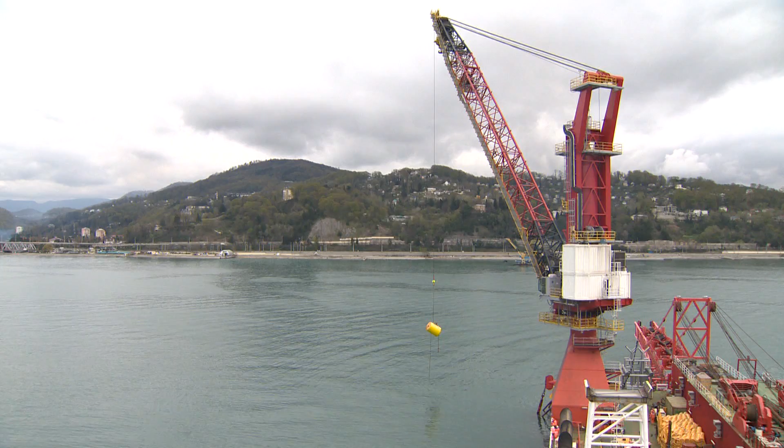This is a project that consists of 150 kilometers of pipeline, and it goes from a town called Dzhubga down to Tuapse, and from Tuapse down to Kudepsta, which is close to Sochi, where the Olympic Games will be held in year 2014. One of the most important things for this gas pipeline is the distribution of the gas, so the infrastructure in the country can be improved and they can prepare for the Olympic Games.

With a total length of 177 kilometres, out of which an offshore section of 159.5 kilometres, the DLS gas pipeline is installed on the seabed, along the shoreline at a distance of approximately 4.5 kilometres, having its final point of termination at the gas distribution facility in Kudepsta, in the vicinity of Sochi. GSP is the only Romanian company to win a project of such a scale in the Russian Federation. The initial value of the contract amounted to $269 million.

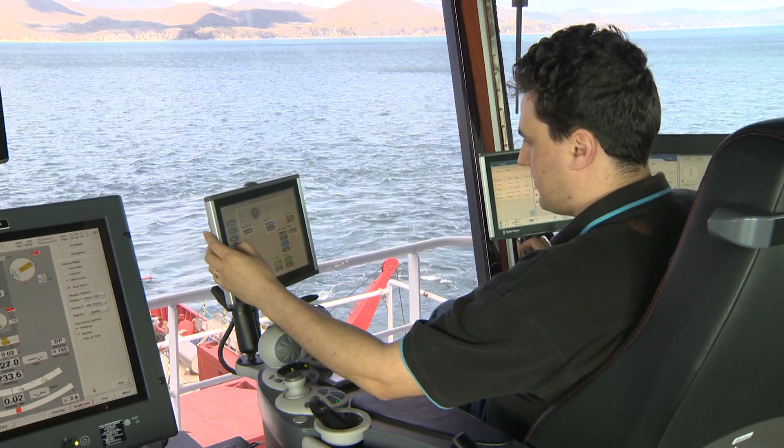The 530mm gas pipeline will have an annual flow capacity of 3.8 billion cubic metres. The offshore natural gas pipeline project was designed in such a way that it should be as distant from the coastline as possible in order to guarantee the substantial mitigation of the environmental impact on the Black Sea coast ecosystem.

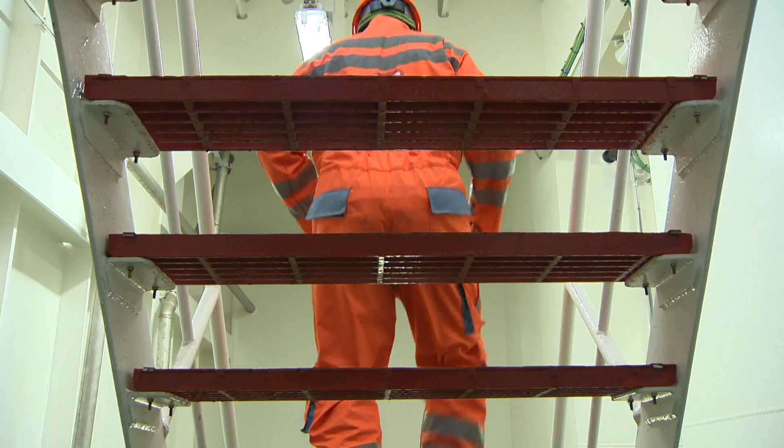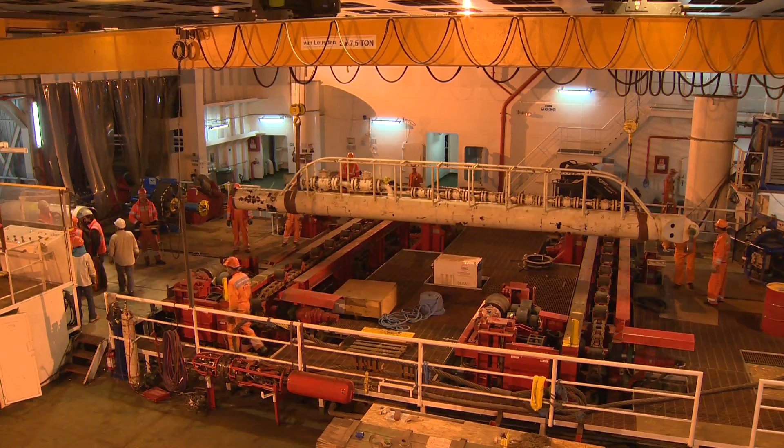DLS is a multicultural project comprising people of various religions and ethnic groups, as well as an extensive professional range, from fitters and welders to NDT technicians, ROV operators, divers and diving support operators, marine crews, designers of pipelines, oil and gas installation and commissioning engineers. A great variety altogether. A great number of nationalities have come together in this project to bring their engineering expertise. Romanians, Russians, Dutch, British, Thais, Malaysians, Italians, Spanish and many more.

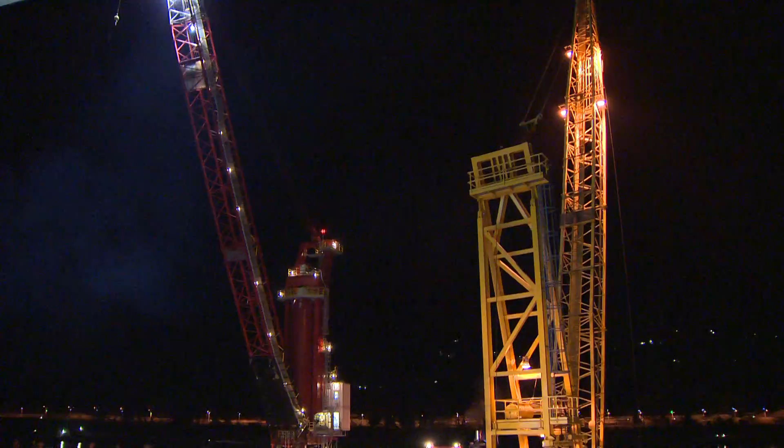The construction of offshore projects was under GSP's coordination. GSP carried out the main offshore works in approximately 100 days between March and July 2010. GSP has experience of large-scale projects and projects of outstanding importance. DLS wasn't in any way a simple project. I consider that this company is a leader in this part of Europe, especially in the Black Sea, regarding the drilling industry and the pipeline. Our job, I mean the Bigfoot One job, is to lay pipe in Sochi.

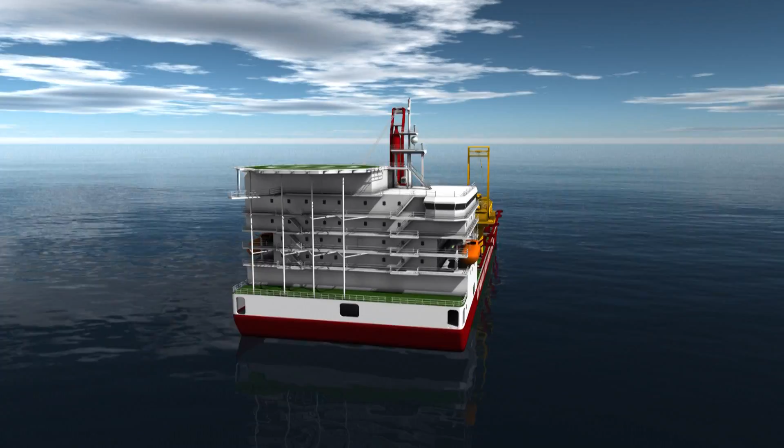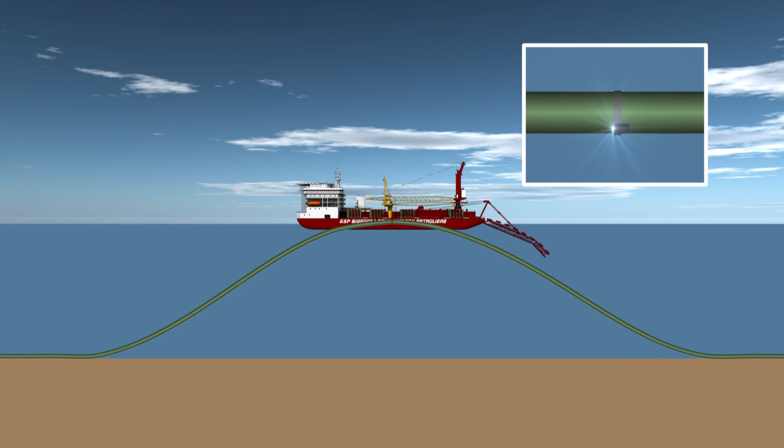The last 5% of the project works were completed in May 2011. Once the connection of the offshore and onshore sections of the DLS pipelines were completed, GSP Bigfoot One performed the final mid-line tie-in, welding together two sections of pipeline near the Kudepsta settlement. Previously, similar works were performed near Tuapse, Dzhubga and Novomikhailovsky.

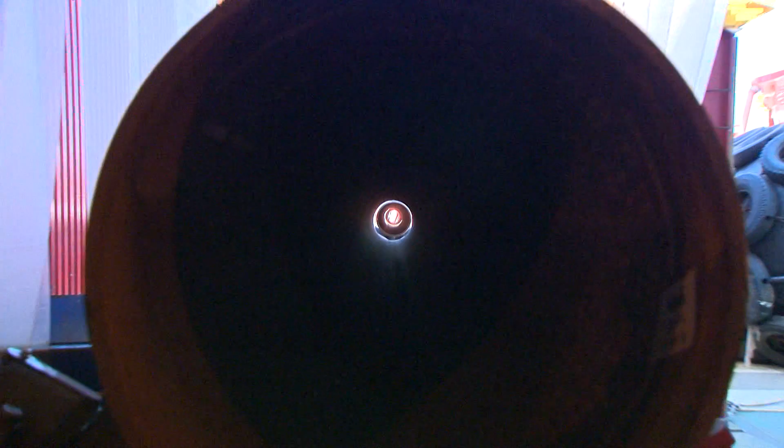The onshore-offshore connection of the DLS pipeline, Southern Loop, was then followed by pressure testing, dewatering and drying. The testing and drying of the Northern Loop and Dzhubga-Tuapse section had already been completed. You may become aware of the dimensions of the DLS project once you learn about the offshore section, which weighs 84,000 tonnes.

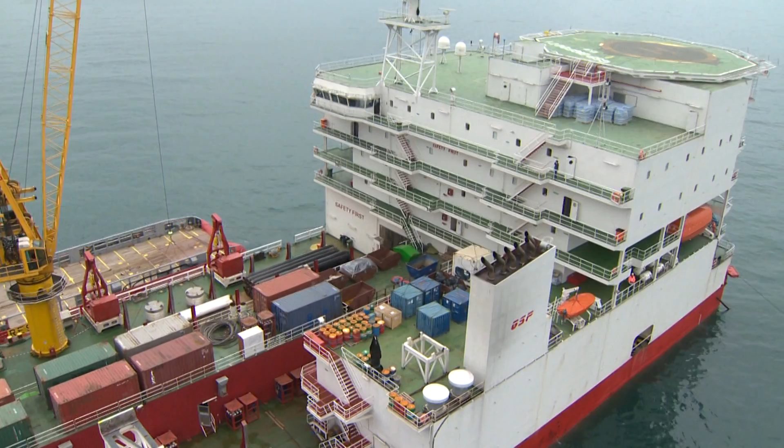GSP's offshore technological camp was quite something. An extensive international fleet mobilised offshore of the Caucasian shore at about 4.5 kilometres. 2 pipe-laying barges, GSP Bigfoot 1, built in 2010 in GSP Shipyard, and Seamast. GSP Prince, the most modern OSCV and DSV ROV in the Black Sea, built in 2009 in Norway.

GSP Phoenix, PSV, intended for manpower and materials delivery. GSP Vega and GSP Queen, the anchor handling tugs. A 12-man, 300 metres of saltwater saturation diving system. A fleet of ROVs for pipeline route surveys, as-laid surveys, monitoring of trenching and divers operation and subsea installation works.

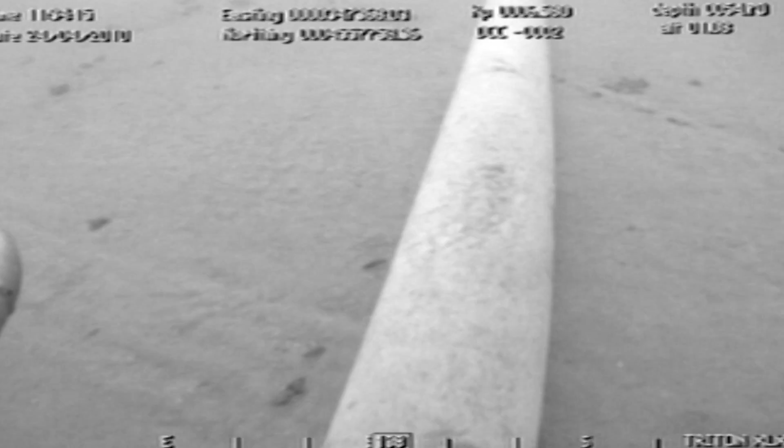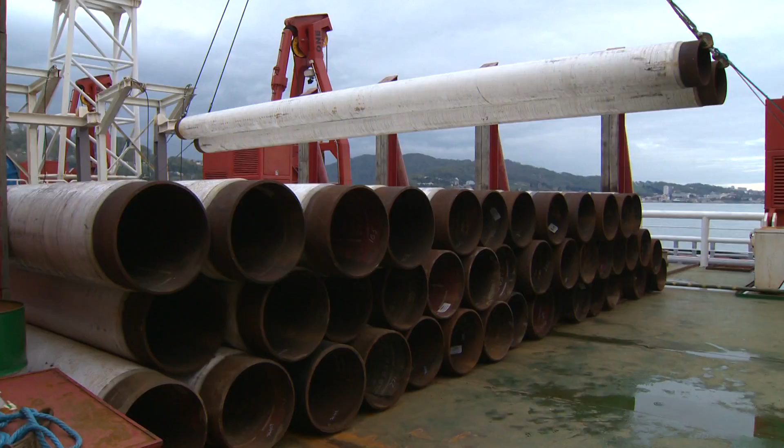The gas pipeline fabrication process consists of several stages. The pipe-laying barges ensure the entire pipeline fabrication and technological processes: beveling, automated welding, non-destructive testing, coating testing, and finally the pipeline launching out of the stinger to the bottom of the sea. The pipes are transferred from the storage area with the help of a special pipe conveyor system, beveled and immediately after that automatically welded.

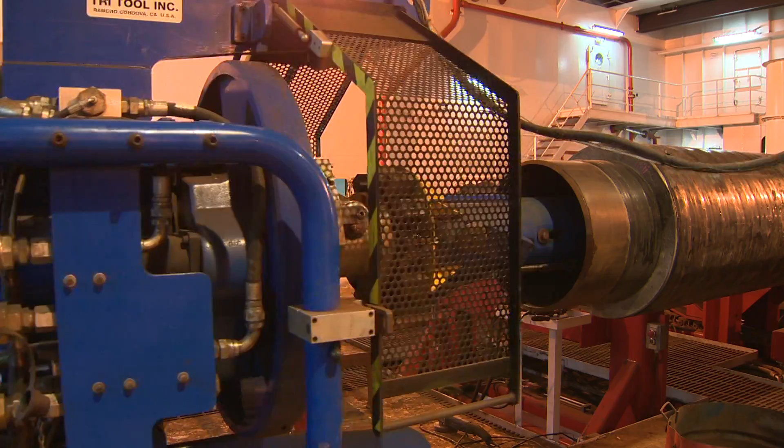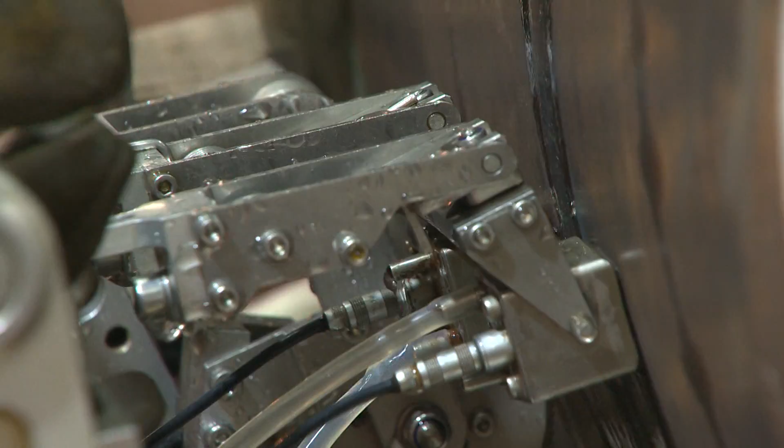Once examined for flaws or defects at the NDT station, a welded joint is treated in a special way to ensure protection from leaks or mechanical damages. All these operations are performed on the firing line. After that, the pipe is launched onto the seabed using the stinger.

The entire process lasts approximately 8.5 minutes. Thus, every 8.5 minutes, the gas pipeline gets 12.2 metres longer. While the vessel moves at exactly the same speed, it is almost impossible to notice the vessel movement.

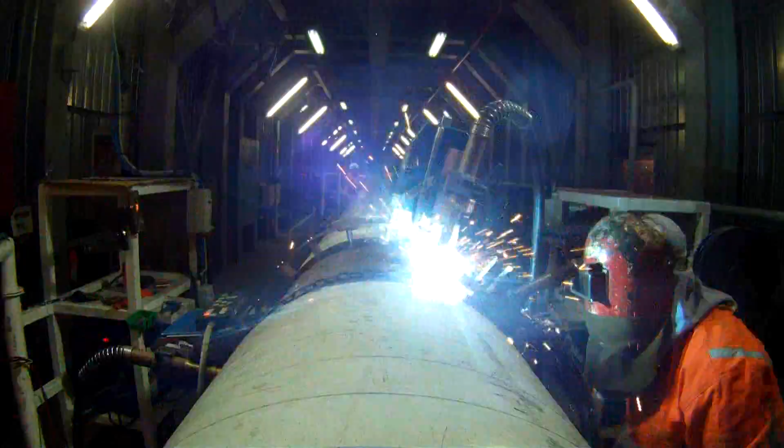The pipeline grows slowly, with approximately 2 kilometres per day. Taking into consideration the offshore mobilisation works, words like slowly have a new meaning. Technologically speaking, a 2-kilometre pipeline installed daily in normal weather conditions is quite something.

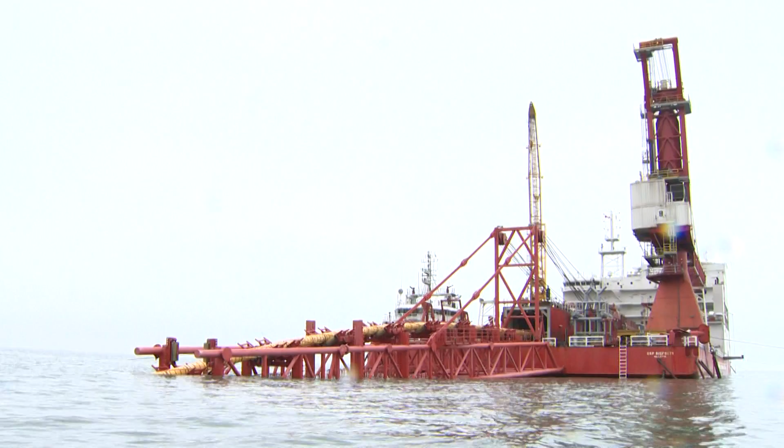The onboard pipe supply for the firing line fabrication process is stored on the main deck, neatly stacked in lines occupying up to dozens of square metres.

GSP Prince looks impressive, and we can assure you it is. It is the most modern OSCV, DSV and ROV vessel from the Black Sea. It was built in 2009 in Norway. The vessel can operate in extreme weather conditions.

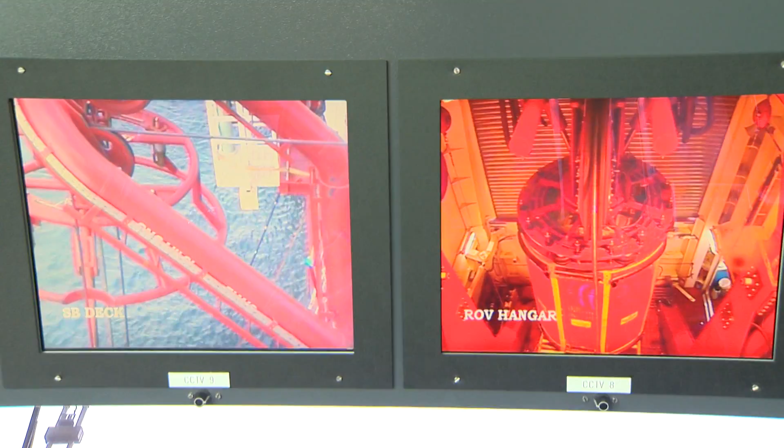It can perform tasks such as underwater inspection of cables, routes and pipelines with ROVs, seabed mapping, subsea installation works, diving operation support, geotechnical studies, and manned and unmanned subsea vehicle support, surveys, inspections and investigations. GSP Prince was the main ROV and DSV support vessel in this project.

In order to lay down pipes, you need a pipe supply, and the pipes are stacked on the deck. The standard dimension of the pipe is 12.2 metres, and at this diameter they weigh 6.4 tonnes each, including the cement coating which ensures the negative buoyancy of the pipeline. All the pipes are manufactured at the Vyksa Steelworks and coated with concrete at the Moscow Experimental Pipe Procurement Plant.

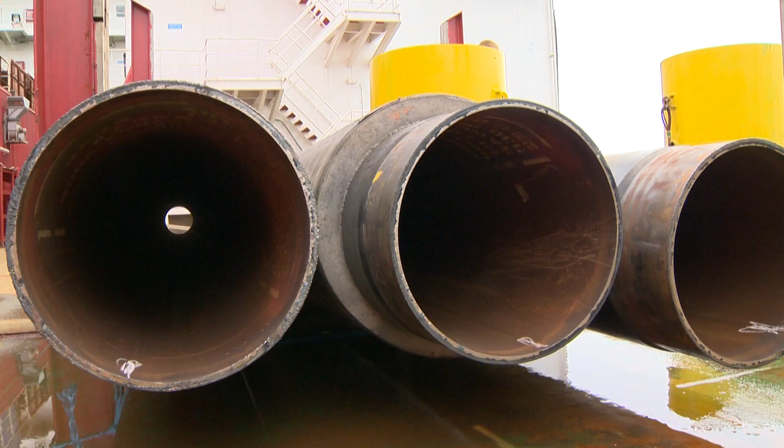They are brought onto deck and stacked in zero bay by the joint handling NOV crane. The pipe joints are stacked in special racks and the same crane moves them onto the production line. The first operation is a quality inspection.

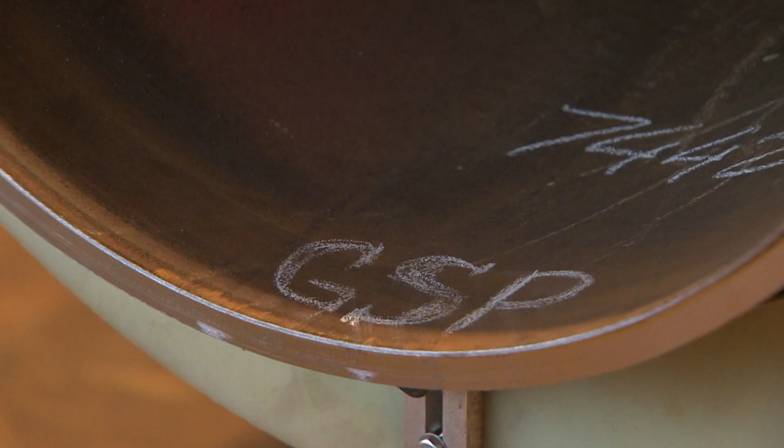The purpose of this operation is to inspect the entire surface of the 12.2 metre long pipe in order to discover any fabrication flaws or deformities caused by handling. Given the impressive size of the pieces, small irregularities may look unimportant, but due to the harsh environmental conditions at the bottom of the sea, any small problem may evolve in time, generating complications. This is why, at the QC station, the inspection is done thoroughly.

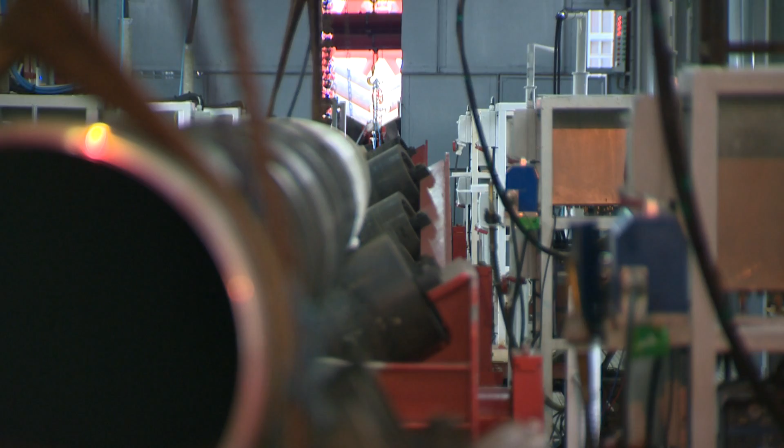Pipes are aligned and directed to preparative workstation 1 for the J-type bevelling operation. Here the bevelling is performed with 2 hydraulic cutters simultaneously operating upon both free ends of the pipe. The picture is pretty simple here. The equipment you see is exactly what is needed in order to lay down the pipes.

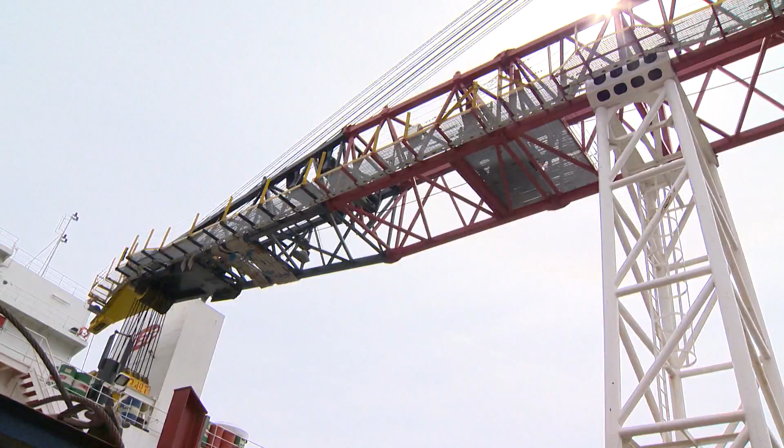A heavy lift crane, a Liebherr with 318 ton lifting capacity, an NOV pipe handling crane, conveyor rollers, an S-lay stinger, and a brand new fully operational firing line and an army of perfectly trained operatives.

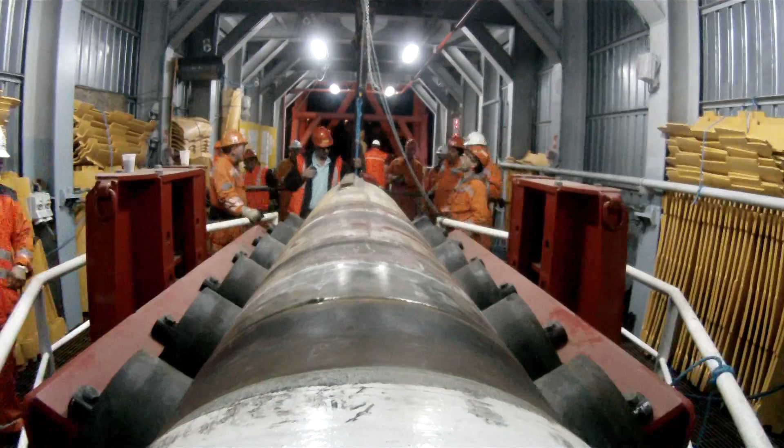This is the first pipe segment, and 6 working stations away it will be placed on the seabed. In this particular case, for reasons that will become clear later, the pipe section has a launching head at the start. This is designed to sustain the traction tension of the entire pipeline, ensuring its tightness in submersion, but we'll get back to this.

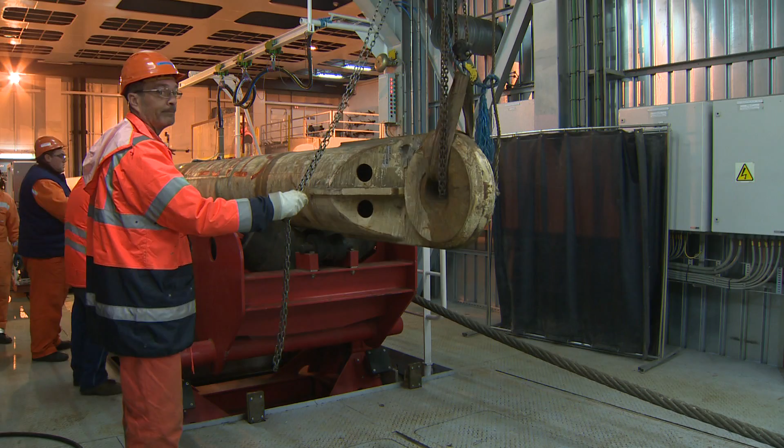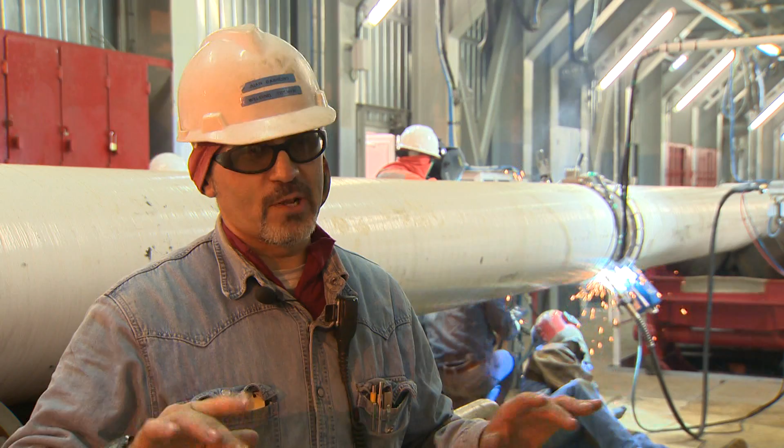The pipe sections are rolled on the firing line or the fabrication line. The most important operation, welding. We have here 3 welding stations, 3 complete welding stations. The first one is the most difficult because we need to adjust the pipe, make the line up, put together, and then we weld 2 passes, the root pass and hot pass.

When we finish, we press the green light, and if all the stations are in green color, the pipe moves to the next station. Then the pipe arrives to station 2, and in station 2 they weld another 2 passes. In order to ensure the welding quality, they preheat the pipe to 150 degrees centigrade using an induction coil. After its completion, the pipe sections enter the fabrication process.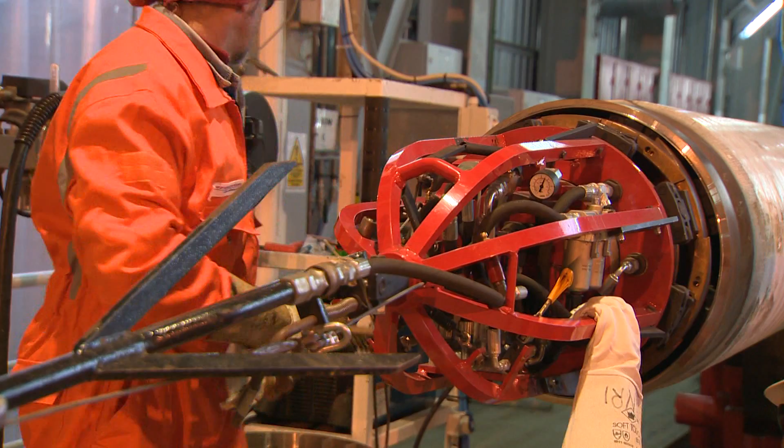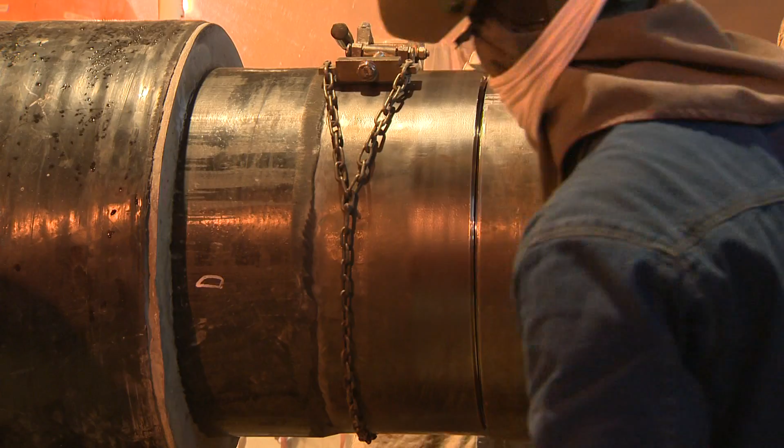The correct welding operation has a number of compulsory stages. The pipe sections are aligned with support of the pneumatic device, which ensures all of the dimensions and alignment requests are observed according to procedures. A complete joint includes 5 welding rings or passes as follows. The first one is called the root, and then comes the hot pass.

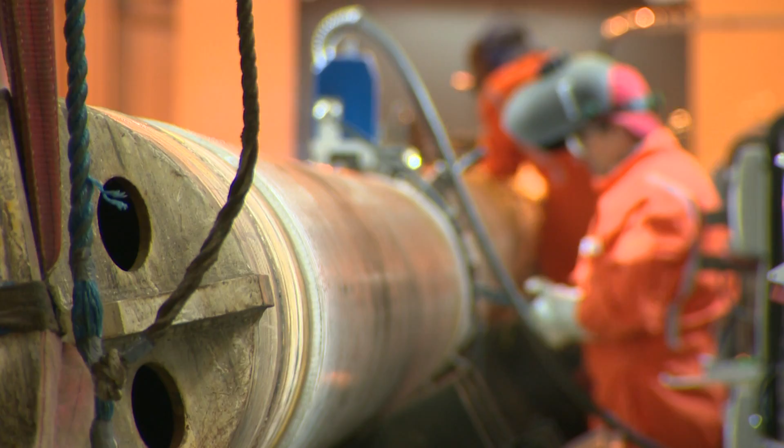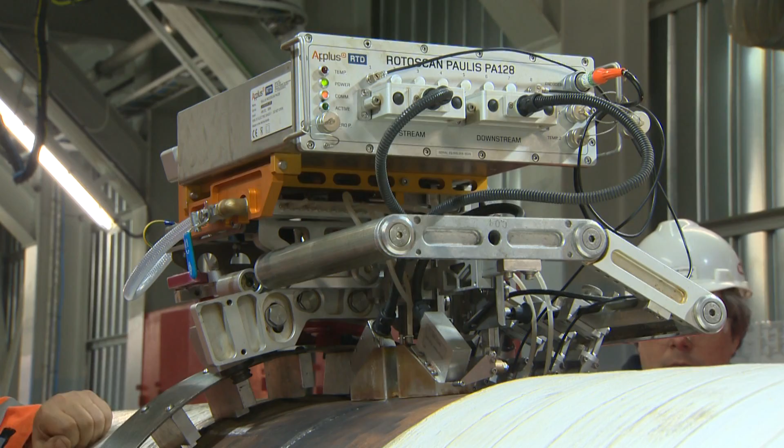No matter how thorough the job is done at the welding stations, there is always a risk taken into account. This is why the pipe goes to workstation 4, where a non-destructive ultrasonic testing is performed. The QC team inspect the welding for gas bubbles, lack of penetration, lack of fusion, porosity or cracks, for example.

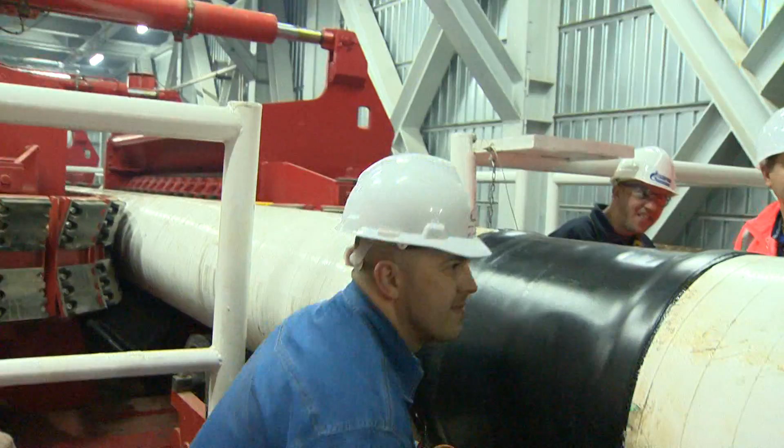We start with checking all the pipes inside the firing line, and we check the dimensions, check pipe numbers and bevel on both sides. After this, we supervise all the activity on 3 stations, welding stations, along the firing line, and when we finish all these activities, we supervise the coating activities on the stern of the barge vessel.

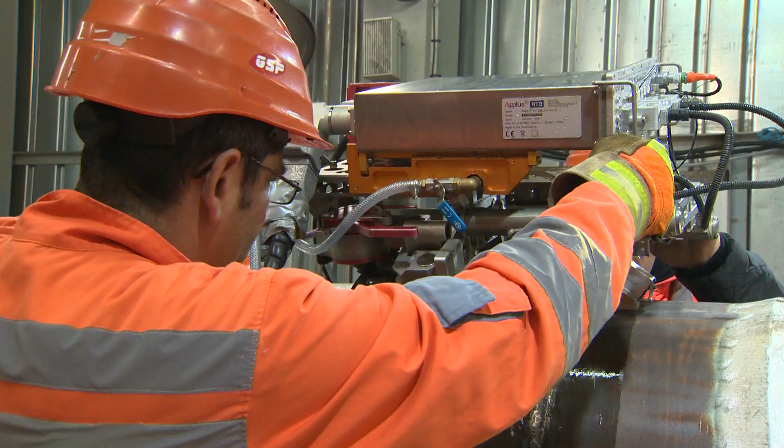Nothing escapes the automatic ultrasonic testing equipment, and the data is analysed and saved. In this case, as hoped for, there is not even a minor quality issue with the welding being checked. And speaking of the QC, there's not a single point in the entire process where they are not present and involved.

Welcome to the 5th station. Here they perform the cleaning operation. The welding is cleaned as well as its neighbouring area and the protective layer of pipe. Here at workstation 5, the welded section of pipe is prepared for the application of anti-corrosive protective layer.

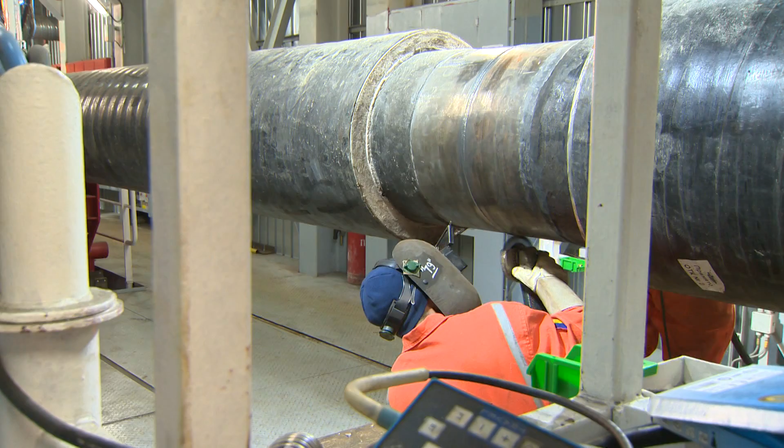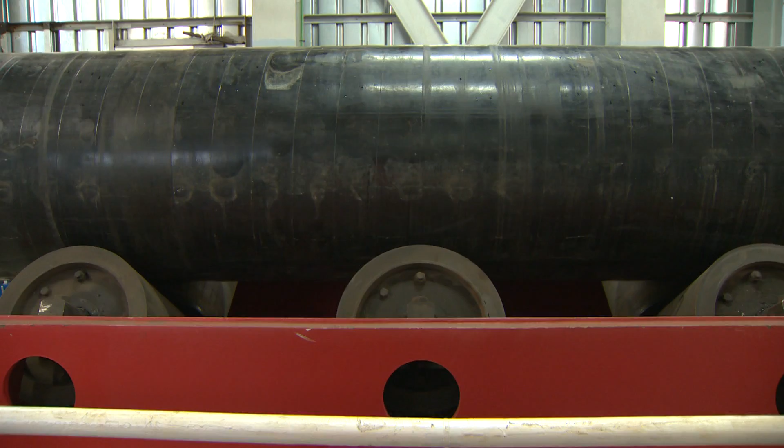From this point forward, what we call the pipeline arrives at the tension area. The tensioners are highly important for the pipe laying process as they are controlling the pipe launching from the barge into the water. Here the curvature radius of the pipe is monitored from the moment the pipeline leaves the last roller of the stinger, as well as the curvature radius of the pipe at the seabed contact point on the predetermined pipeline route. By contrast with other places and processes where speed is the most important factor, here the clamping and launching tension matters most.

And just how strong do you think the tensioners are? 80 metric tons each, that's how strong. 2 train locomotives on each side could not hold the pipeline as well as the tensioners do here.

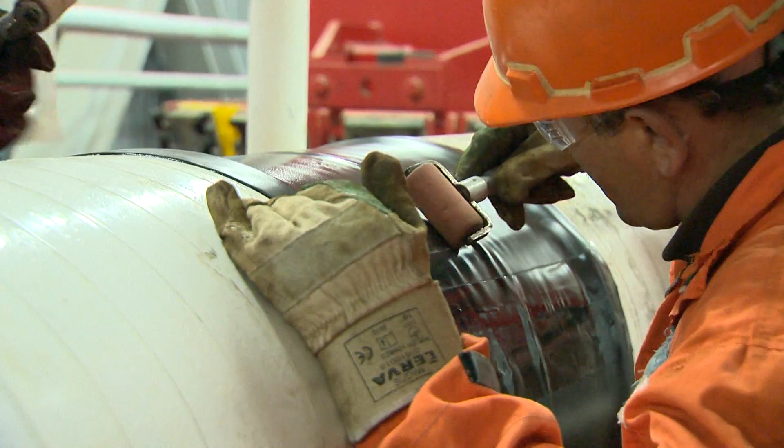Let's return to the firing line. We're here at workstation number 6. Here, in the process of protecting the welding, an extremely important element is added, the heat shrink sleeve. The easiest and most effective way to do it? With a gas lamp.

The heat shrink is applied over the uncovered area of the previously cleaned metal surfaces exposed to the welding process. The sleeve has the necessary width to cover the unprotected area. Being heat sensitive, it shrinks over the designated area under the gas flame exposure, leaving behind a perfect field joint coating resistant to corrosion in time.

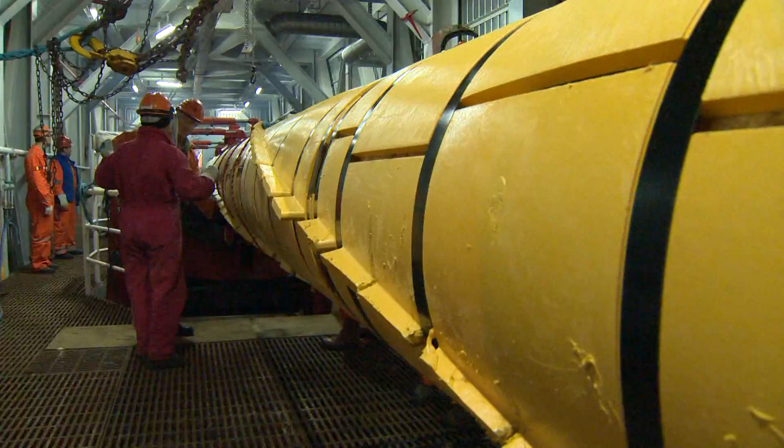It is obviously a little bit crowded at Workstation 6, but there are two more operations carried out here. Firstly, the pipe that goes into the mountain casing is wrapped in stakes, or as everyone calls them, crocodile tails. This is for obvious reasons.

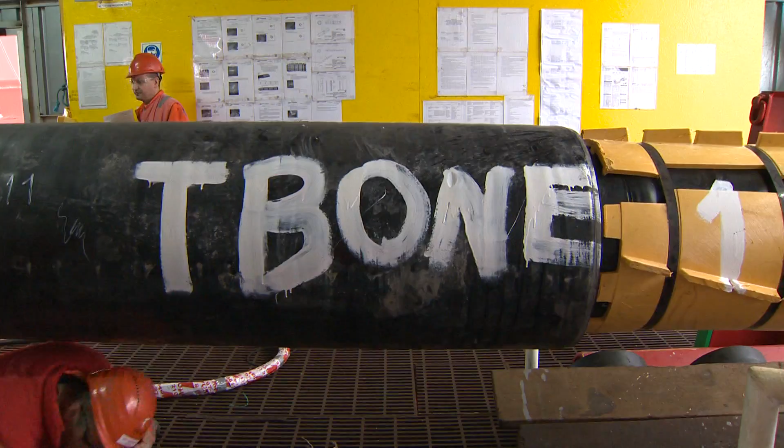And secondly, for the concrete coated pipe, due to the fact that the cement field joint coating is thick, the protection area had to have the same thickness. This is done with foam injection. Step 1, they cover the area with a metal sheet. Step 2, final fixing of the metal sheet. Step 3, a little more predictable, they inject the foam.

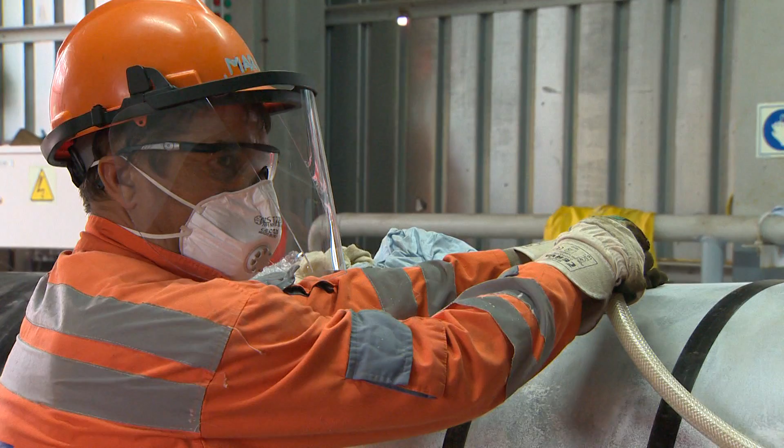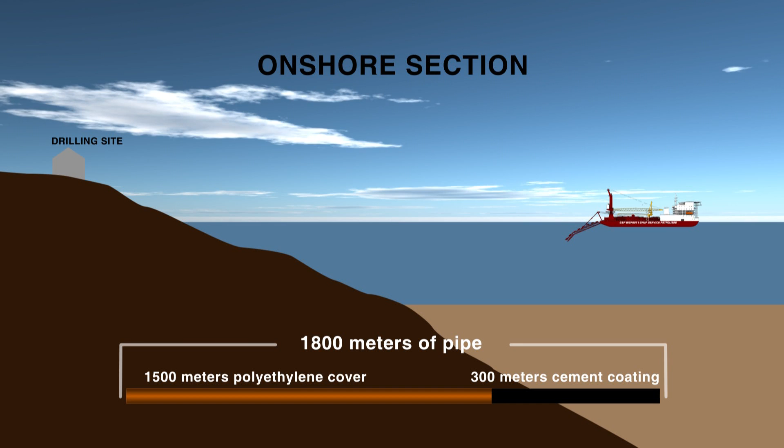Now let's stop for a minute and see what this is all for. An onshore approach section. So a total of 1,800 metres of pipe, 1,500 metres have a polyethylene protective cover, 300 metres have a plus of cement coating. Out of this 1,800 metres, 1,500 metres are pulled through the casing that awaits already on the coastline.

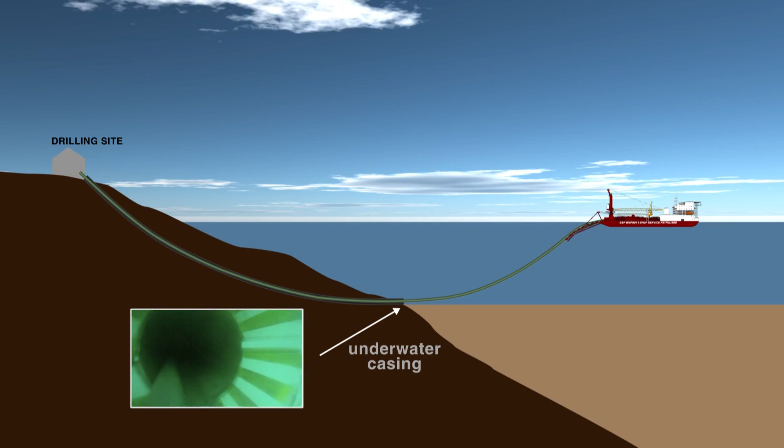From the shore side end, a drill string is sent down. Slowly it goes out from the underwater casing, being pulled along by GSP Bigfoot 1. Remember the launching head? Now we go back to it, because it's time for action. The drilling string is attached to the launching head, and again, slowly, very slowly, 1,800 metres of pipe go back through the directionally drilled casing and up into the mountain.

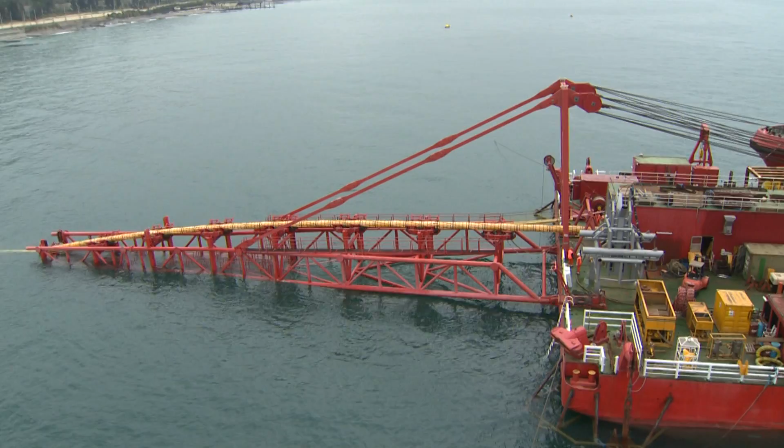Simple as that. Actually it is, but only because thousands of incredibly beautiful minds previously worked their brains out till this process is just right. Impressive.

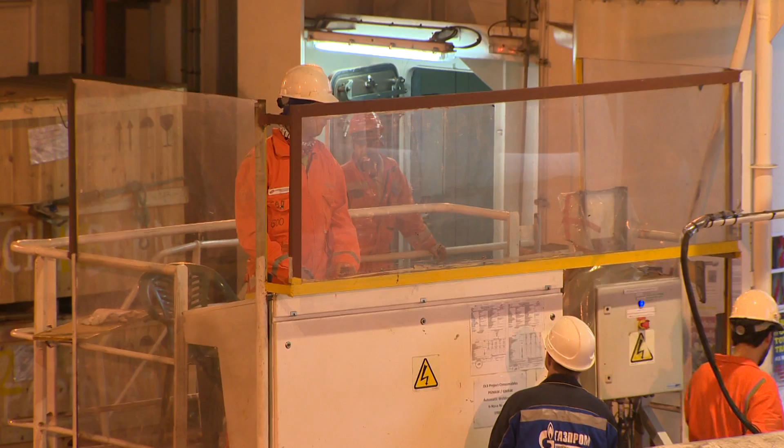Once the pipeline leaves Workstation 6, it is ready to get into the water, but not until getting the OK. Each workstation is endowed with a control panel with ready and work in progress commands. While one of the red lights is on, it means that somewhere on the firing line someone is still working. Depending on the works being performed at the time, the station operator enables or disables the station status. Immediately all operations are completed, the green lights appear.

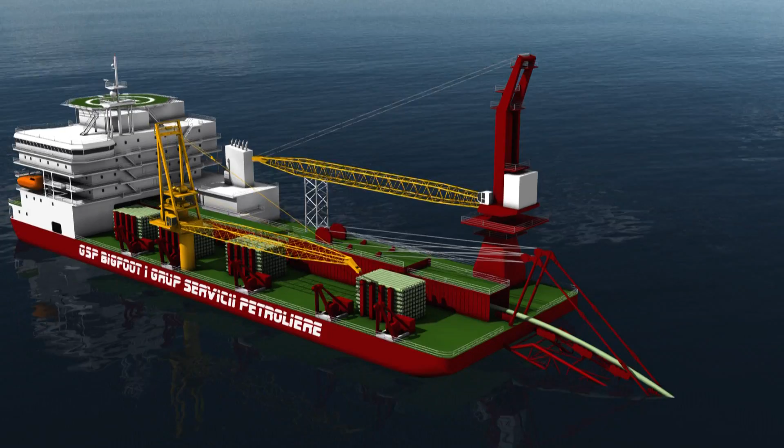Of course, the launching of the pipeline into the water is performed according to a perfectly designed process, with the support of the stinger. It does not only sustain the pipeline, but also controls its curvature radius. The curvature radius is highly important. In fact, so important that this process doesn't have a name but two. The superior part of the S the pipeline designs into the water is called the overbend. The inferior curvature is the sag bend.

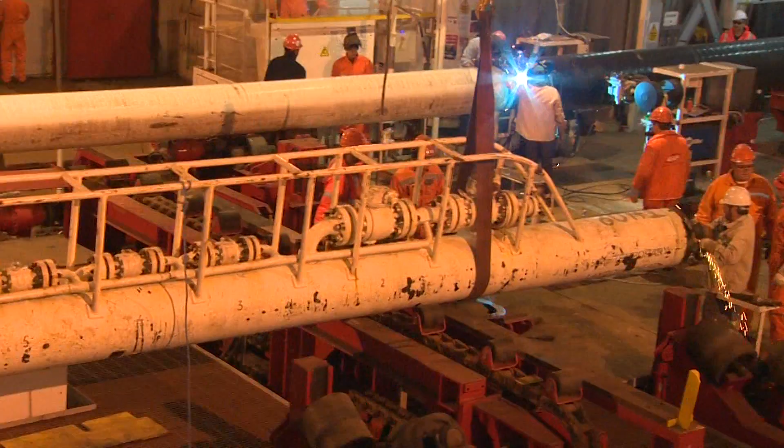So, they have just finished welding the last piece of pipe, but before they perform the connection between this one and the one already at the bottom of the sea, the preparative is made in order to test the pipeline. The pigs rush in. The pipeline internal gauges are basically big cylinders with the same diameter as the pipe. Using water pressure, the pig pushes the device throughout the entire length of the pipeline. And if everything is okay, they come out the other end in perfect shape. Actually, they did come out intact. But the workflow is not yet complete.

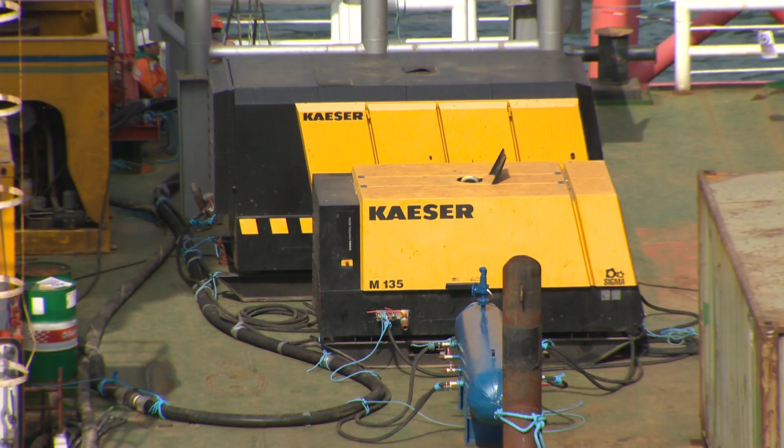For protection purposes, the pipe must be protected and buried in sand. For this, they use a jet air tool. In the final phase of the operation, the pipeline will be trenched from the casing exit to the tie-in area on a distance of 300 meters to a depth of 1.5 meters. This work will be performed by means of a jet sled machine.

Operating at high pressure, the machine will dislocate the soil, leaving behind a desired trench depth which will protect the pipeline in the future. They put this tool over the pipe. The water is pumped at 20 bars and the sand is displaced, and gravity does the rest and the sand settles down over the pipe.

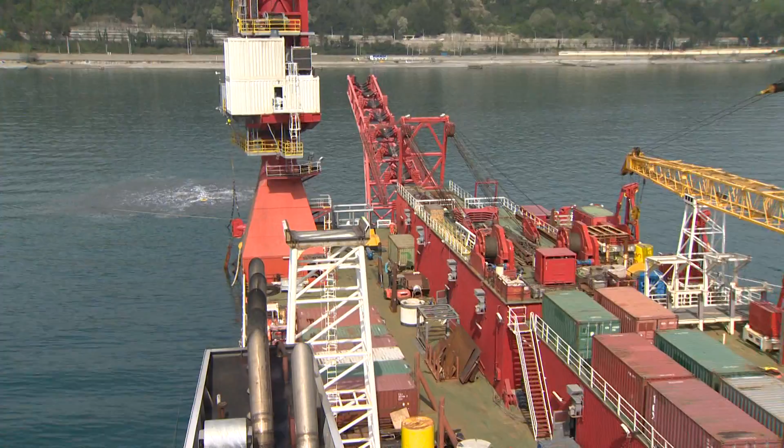Sure, now it is hard to see what otherwise is obvious in this big technological marine adventure. As the anchor foreman said, it seems chaotic. Well, maybe it might look like searching for a screw in the haze of pipes and anchors, but as the foreman added, it's highly controlled chaos. So in the end, it is all for a big purpose. Though it's not visible under a metre of sand, the pipe is extremely important for this developing area.

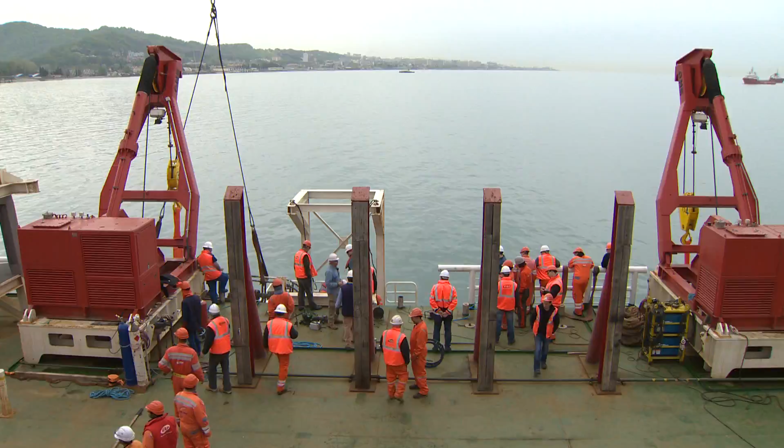We have a few loose ends now to try to clear up. How do they make a joint between two subsea pipelines? We have a name for this operation, midline tie-ins. Let's see how the offshore installation and welding engineers figured it out, or even better, how they do it on board GSP Bigfoot 1.

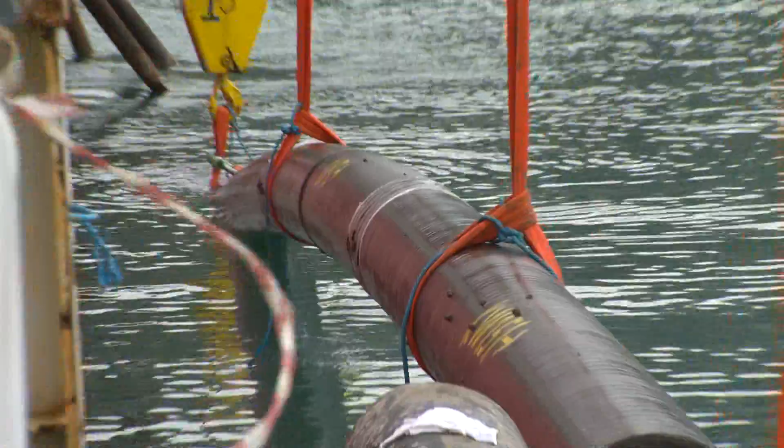Lifting of the pipeline end will be carried out using the 6 davits installed on foundations of Bigfoot 1. The davits will lift the pipeline above the waterline in a safe manner so that welders can perform the tie-in weld. 6 davits are installed on the technical vessel. 3 of them hold the previously made pipeline section, the other 3 the newly made pipeline section. Both ends are held above the water at deck level, one end facing the other.

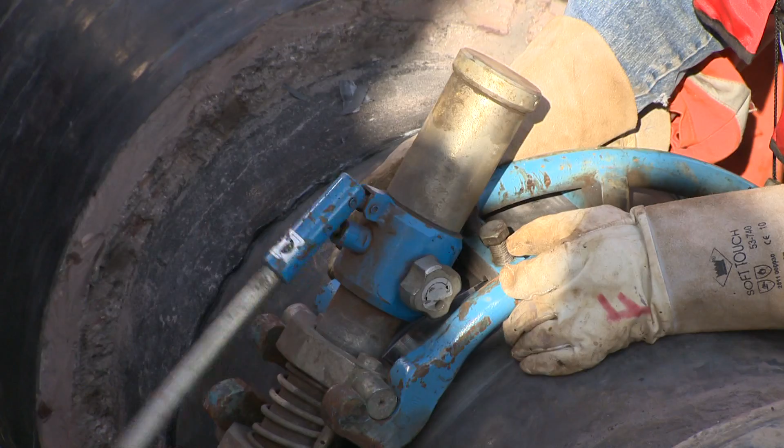First they take off layer after layer of coating. Concrete and metal reinforcement structure, then the polyethylene layer. Then, with the support of an external line-up clamp, they perform by hand one last weld. Be assured the handmade weld is as good as the automatic one. Those guys know their business. They have sealed pipelines all around the world. After the weld is complete, field joint coating is applied to protect the tie-in weld area.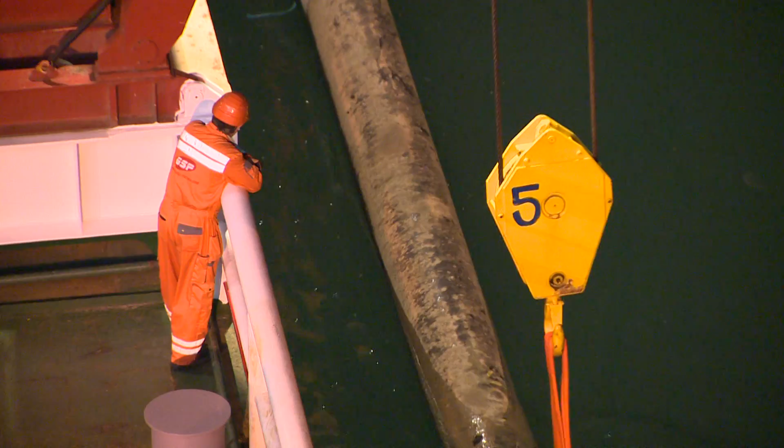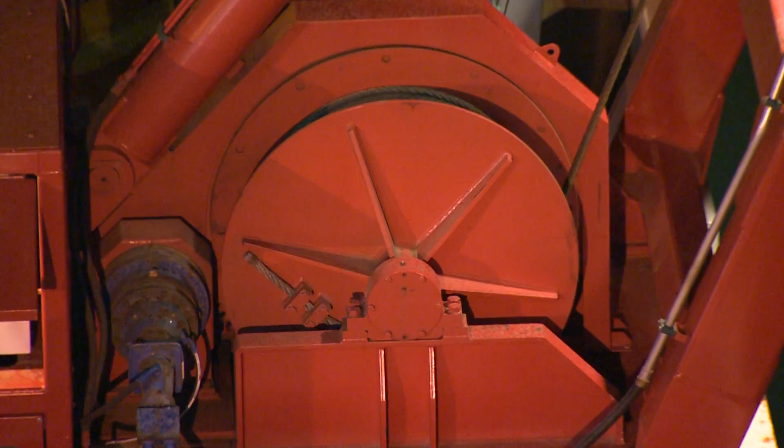There's another operation to be performed in order to consider the job ready. The pipeline has to be placed back on the seabed. In order to compensate for the loop made when the 2 pipeline ends are taken into the sea, GSP Bigfoot 1 performs a side movement and lays the entire pipe on the bottom.

This is one of the moments when the ROV enters the stage. This is Mohican. It's a light work-class inspection ROV and it has fitted a Hydrolec 5-function hydraulic manipulator, a SeaKing sonar, a silicon intensified target black and white camera, a color zoom camera, able to operate at 2000 meters depth of seawater with 130 meters of working tether.

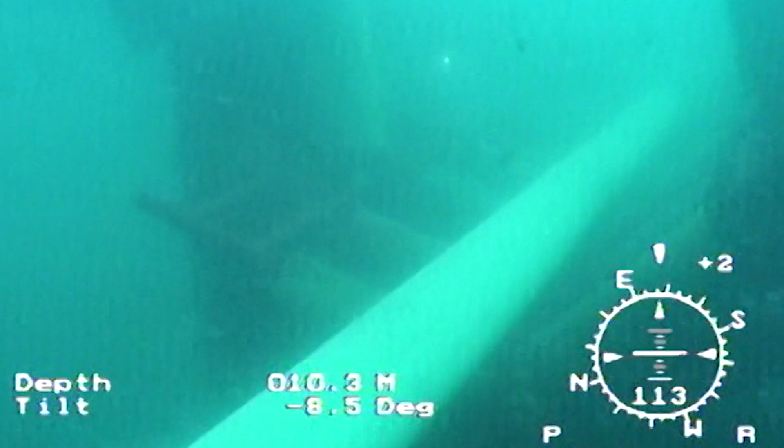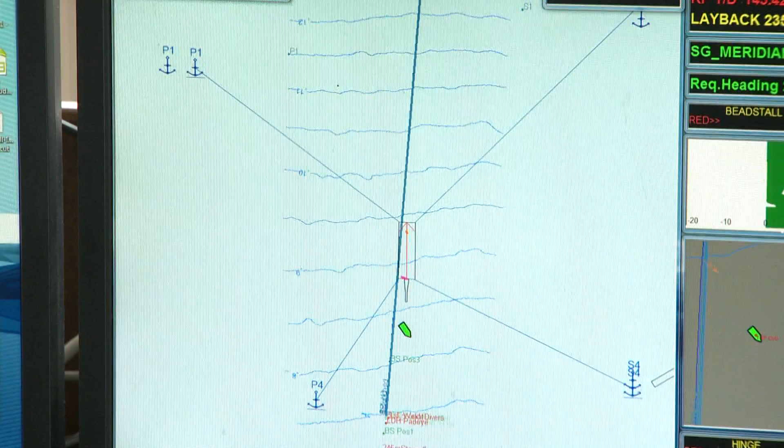Because of this subsea robotic vehicle, any problems that might appear after the pipe enters the sea could be instantly spotted and rapidly resolved. Throughout the process, the technical vessel must be highly stable. 8 winches control the pipe layer's station, keeping it stable. Here's the place the 8 winches are controlled.

This way, 8 thin tentacles with 8 anchors at the ends cling onto the bottom of the sea. With slow movements carefully calculated and verified by computerized survey systems, they lead the barge in the required direction. Each anchor winch has a tension capacity of 80 tons. Each anchor has a weight of 10 tons. For this kind of floating technological camp, you might take into account that it becomes compulsory to use some impressive pieces of technology to control it.

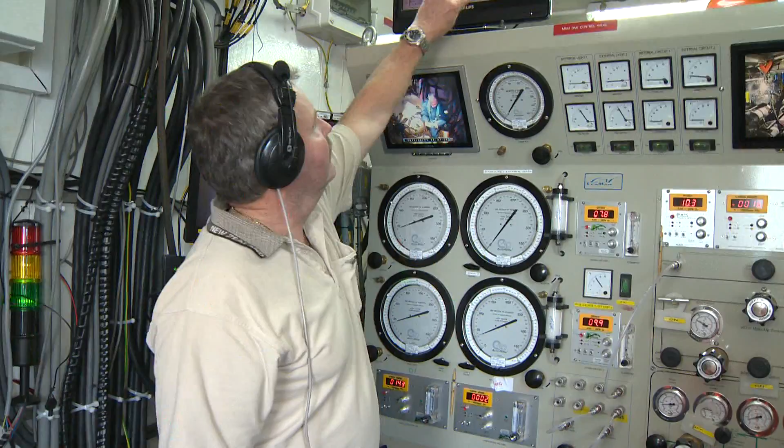Now let's have a look over the place where the pipe goes, the seabed. That place is not always a pipe-friendly place. For that you need a special ship. GSP Prince is an offshore support vessel, perfectly equipped for this kind of job. First it surveys the bottom, and well-trained men decide where the pipe should go. For that they use an impressive ROV, Triton XLR, and his little brother, Navajo.

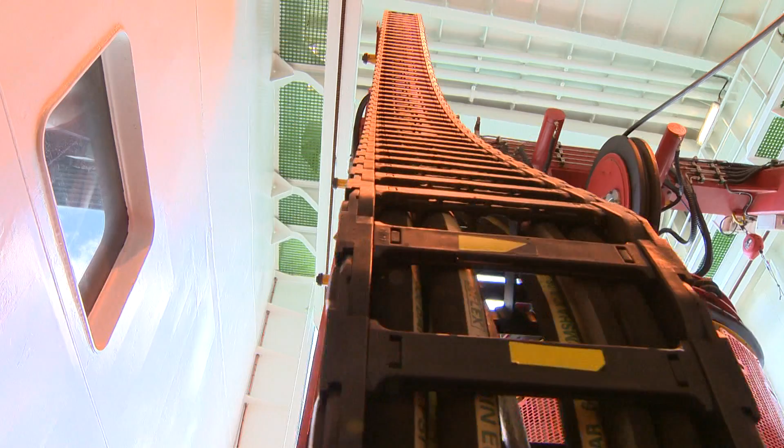The system is about 125 horsepower, roughly. It's got a 2,000 meter rating for depth. It's got 2 fully functional manipulators, one 7-function and one T4 manipulator. If the seabed is good to lay pipes, but not good enough, the divers team is called. Sometimes they actually have to excavate into the seabed so the pipes don't bend or fracture.

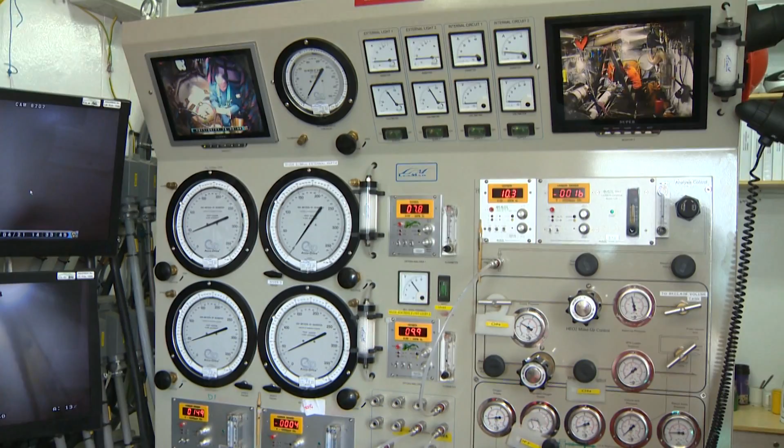It is important to identify solutions to answer particular challenges, as in offshore installations it is important to handle the troubles, and GSP Prince can handle heavy problems. Divers may be mobilised for subsea surveys, installation, decommissionings. They are an outstanding professional body. This time they perform a subsea welding operation. The outstanding well-trained divers team can go deep underwater and weld in such a manner they make us believe it is a normal thing in the world.

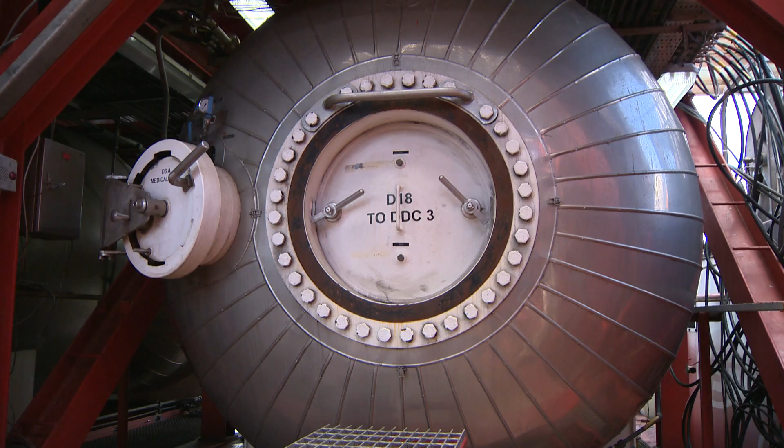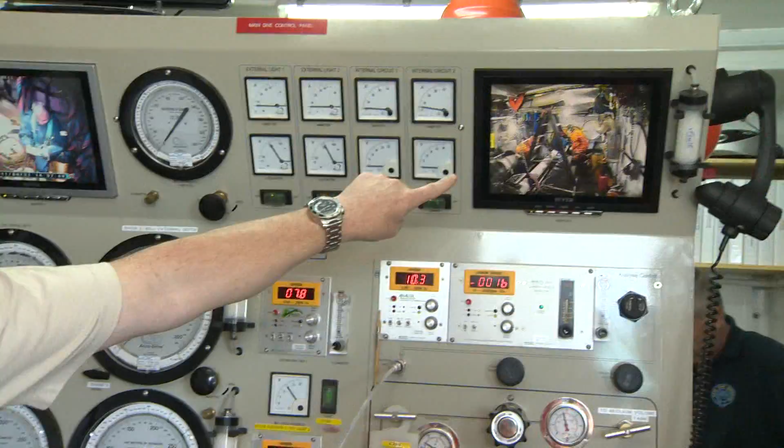First they have to stay in hyperbaric chambers. The length of the interval they actually live there depends on the diving depth they have to reach. Yes, they are a special breed. We have the diver here in the bell. He monitors the divers' gas. And the 2 divers, you can see their umbilicals are going out to the bottom, and they are now in the habitat. The habitat has been blown dry, and you can see the 6-inch pipeline here. And right now, they are halfway through the first weld, the root pass on the first weld.

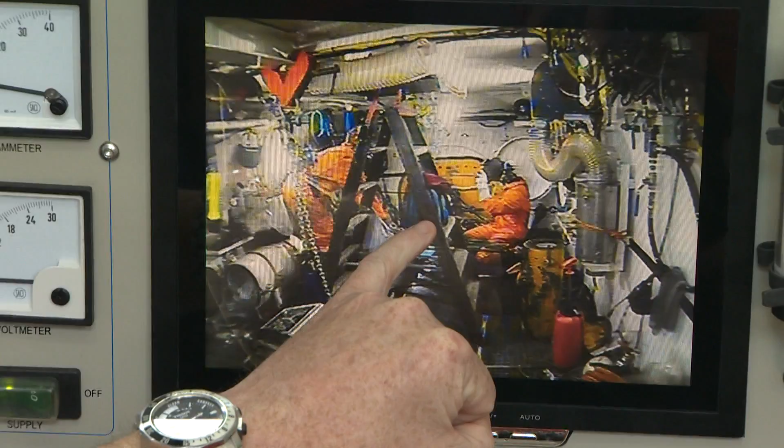Without leaving the pressurised tanks, they enter the diving bell and go deep to the bottom of the sea. Sometimes they reach hundreds of metres of salt water. This system is rated for operation in 300 metres of salt water. Everything is constantly monitored. The air inside, which is actually a gas which makes you speak like this. The sleeping hours, the food that enters through here, and of course their health.

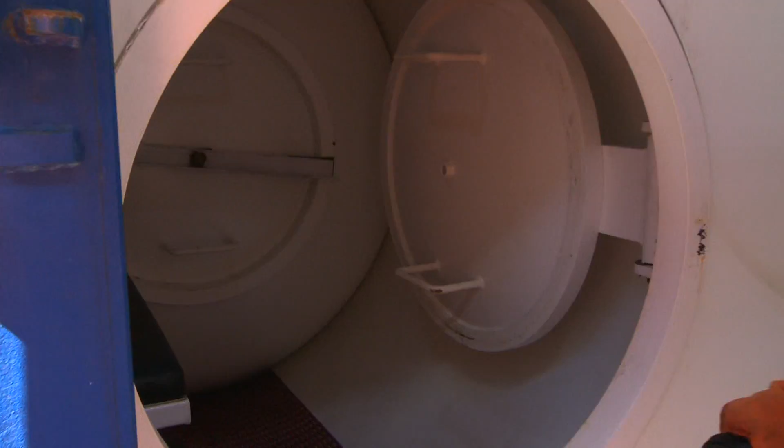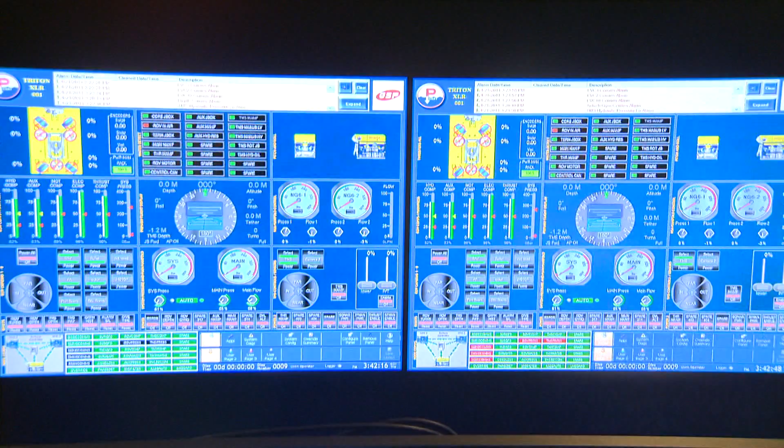Sure, GSP could choose an easy way: 2 welders sitting on the pipe and welding. But no, they went the last mile. The welding is done in a perfectly controlled environment, the hyperbaric subsea welding chamber. After completing the subsea survey with the ROV DSV GSP Prince, the place is ready for the next step, laying the pipe. But we've already been there.

So this is how things were done from GSP's perspective. But you cannot honestly say that things are done till the client says so. So let's see if the client is happy. Right now, the gas flow through the pipe is on standby. But in a matter of seconds, the entire system, pipe and gas control units, will start running. For this, the Gazprom Vice President and Russian Prime Minister are present.